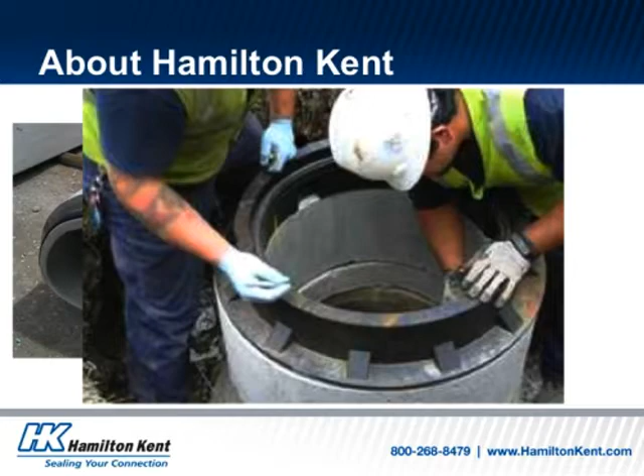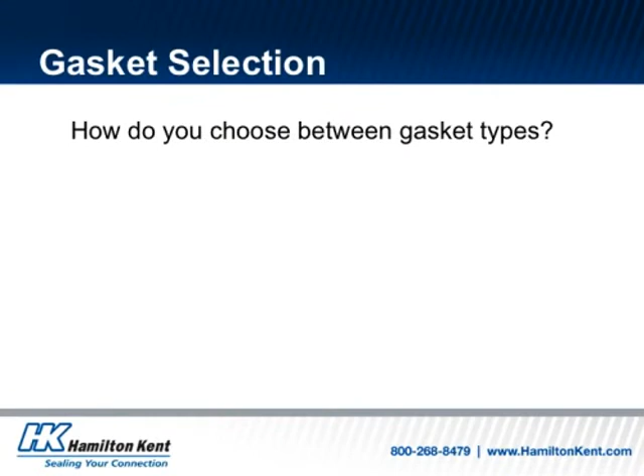In this webinar, we will outline the process of gasket selection and current pipe gasket standards. While gasket selection may seem straightforward, there are many aspects to ensure the right gasket is selected for the application. The first major factor a plant must consider when selecting gaskets is the type of tooling being utilized. This will narrow the selection of gaskets immediately.

Number two, if you are purchasing new tooling, you can formulate a plan for gaskets at the same time. You will have some control over how much you pay for gaskets based on the configuration of the joint. The tighter the joint, meaning the smaller the total annular space, the smaller the gaskets, and the lower the purchase price should be. But remember that the tighter the joint, the more exact you'll have to be during production.

Number three, what are the contractors in your market expecting? O-ring, profile, or pre-lube gaskets? Checking with your customers would be a good idea and could dictate to some extent what gaskets you end up using. Some plants decide what gasket they want and don't give customers an option. This depends on your relationships and your ability to train customers on the use of a new gasket type. It's likely some education will be needed to get them started.

The final consideration is what gasket characteristics are most important to you. If you say price first, that may limit your options. While price is always important, the overall value to you and to your customers is of greatest importance.

We had a customer tell us that they wanted to switch to a pre-lubed gasket because it was more contractor-proof. They figured that if the contractors were not going to equalize or lubricate the gasket anyway, the plant might as well send out a gasket that did not require these steps. They figured money would be saved by cutting down on the number of field service calls, even though the gaskets were more expensive.

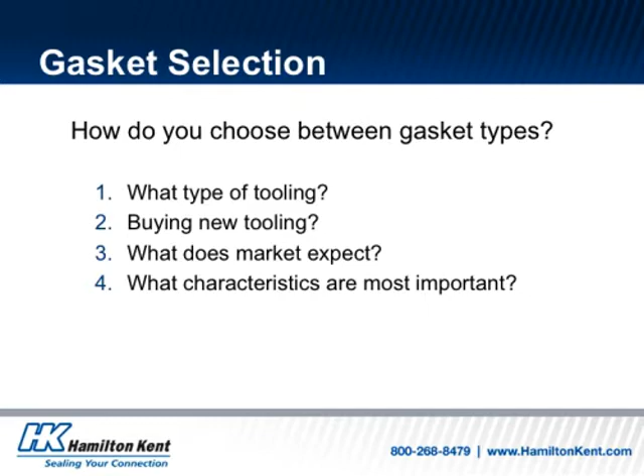The next step in the process is to have your gasket supplier outline your options via the following process. First, the gasket company's engineering department will review the project or plant requirements and your plant's drawings for the total annular space, the diameter of the spigot, and other relevant dimensions depending on the gasket type. The engineers will then determine which gasket or gaskets they have available that will meet the requirements found during the evaluation.

Finally, they will calculate the correct amount of stretch for the selected gaskets to determine the cut length of the gasket or gaskets. Obviously, they want to supply a gasket that will provide enough deformation and sealing force, but also ones that can be installed on the spigot with a reasonable amount of effort and will not be too loose and roll out of place when the joint is closed.

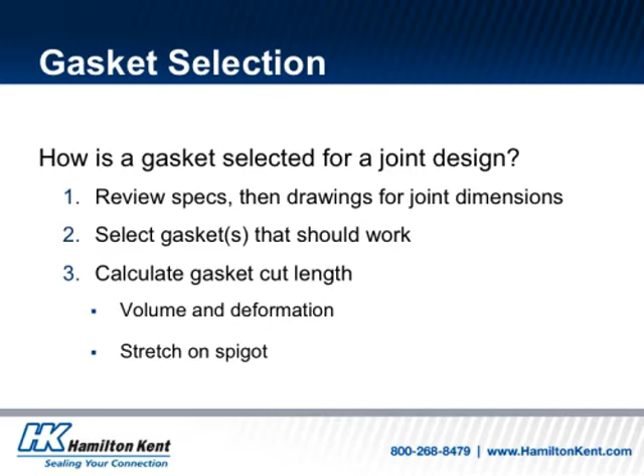Here's an example of a form containing gasket data you should expect to receive from your gasket supplier. The sheet should contain all of the critical measurements with regards to the selected gasket for each pipe size, including the part number, size, type, height, and more.

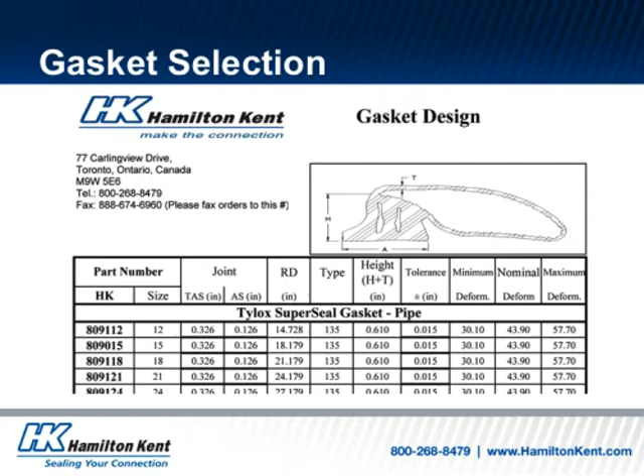This is all important information you should keep in your records, especially if you are responsible for a plant certified under the American Concrete Pipe Association's QCast program or the National Precast Concrete Association's Plant Certification Program, as inspectors may ask to see it during their inspections.

Now let's talk about material selection. We expect that in some cases, the gasket material your plant uses will be dictated by the specifications on a project. But in most cases, there is no material requirement, so you're getting the rubber material selected either by your plant or by your gasket supplier to meet everyday requirements. You may be required to utilize gaskets made of specialty rubber materials like polyisoprene for C1619 Class A or C361 projects.

EPDM rubber has excellent ozone and UV resistance, so gaskets made of this material are used for applications where the gaskets are expected to be exposed to these elements for an extended period of time. For instance, box culvert or pipe where the gasket must be glued onto the spigot in advance of shipment to the job site. Other rubber materials might deteriorate enough in these situations to jeopardize their performance on the job site. EPDM is also a great material for applications where the joint could be exposed to acidic or high alkali conditions.

Some projects require oil-resistant gaskets, which are usually made from neoprene or nitrile rubber. These types of projects include airports and parking structures or lots where there is potential for exposure to high levels of de-icing chemicals, oils, and fuels. In these cases, it is absolutely critical that your sales and estimation team pay close attention to the specs and even ask the project engineer to be certain. The price of these materials is significantly higher than typical rubber gaskets, and the delivery time will be substantially longer, so it will have a big impact on your bid price and on your schedule.

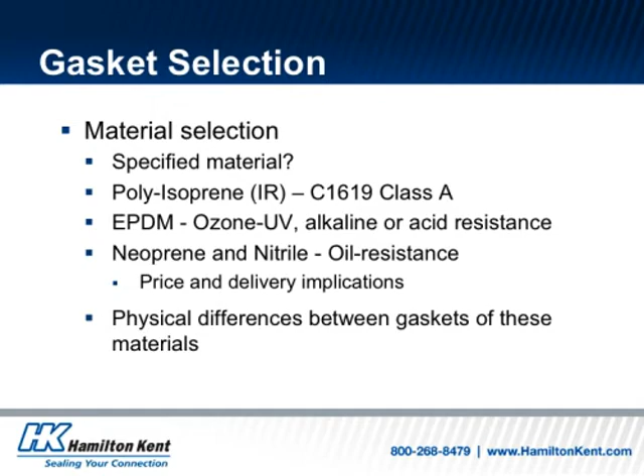One final note, there will be physical differences between gaskets made of different materials, especially neoprene and nitrile. Gaskets manufactured from these two materials will feel harder and more rigid and will be more challenging to install on the pipe. In this case, completely closing the joint will take more insertion force.

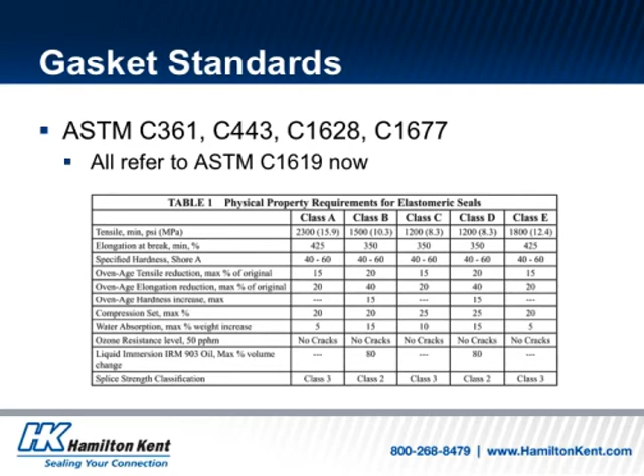Now let's take a moment to talk about ASTM requirements for gaskets. The industry requirements that were popular for so many years now refer to one specification for the physical properties of rubber gaskets, and that's ASTM C1619. So while you still see requirements for ASTM C361 and ASTM C443, your sales and engineering team will want to be familiar with the corresponding requirements in C1619. This is an outline of the different physical properties for each class, which I'll review on the next slide.

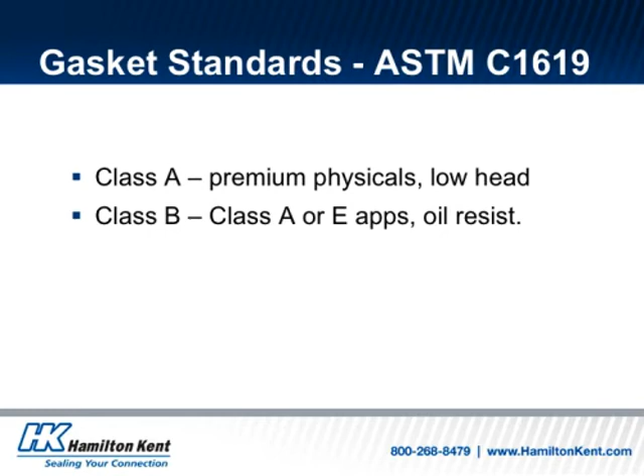Briefly, these are the descriptions for various classes of C1619 materials. Class A, this is your C361 gasket, which is used for low head pressure and will have premium physical properties, such as higher tensile strength. Class B, this requirement is for Class A or Class E applications, but with oil resistance. Class C, this is your everyday gasket for most common applications and corresponds with C443. Class D, these gaskets would be for Class C applications, but with oil resistance. And finally, Class E is for gravity flow sewers with 30 feet or less of hydrostatic head.

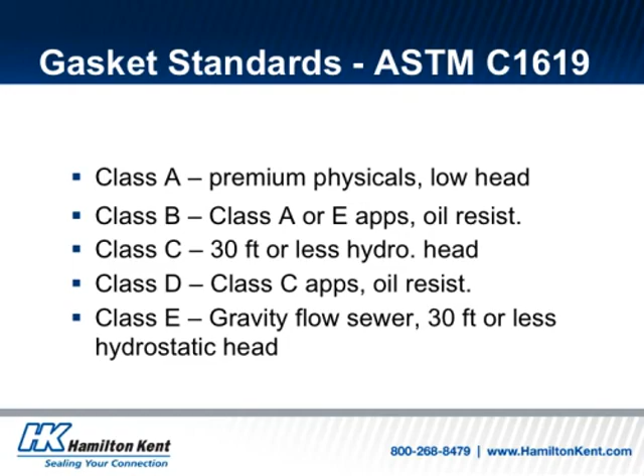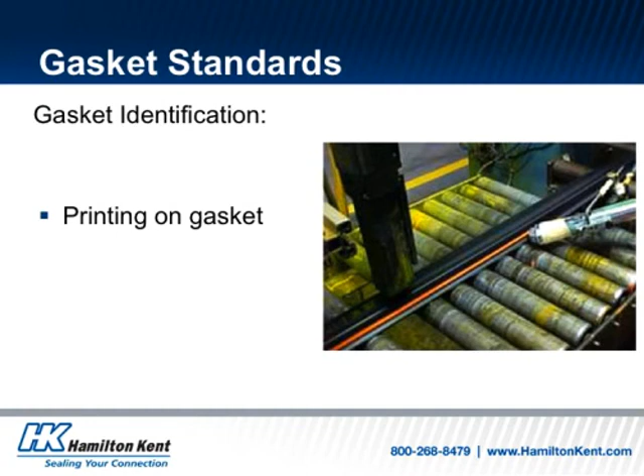Once you have specified your gasket, how do you know the gaskets you received in the field meet the project requirements? First, check to see that the gaskets are printed with the ASTM standards that they meet. Second, check to see if there is a colored stripe printed on the gasket. This is a common feature on specialty rubber materials to make them easily identifiable in the plant and in the field. In this photo, you can see the printing process with spec and product info printed in yellow on the top and the material identifying stripe printed on the front.

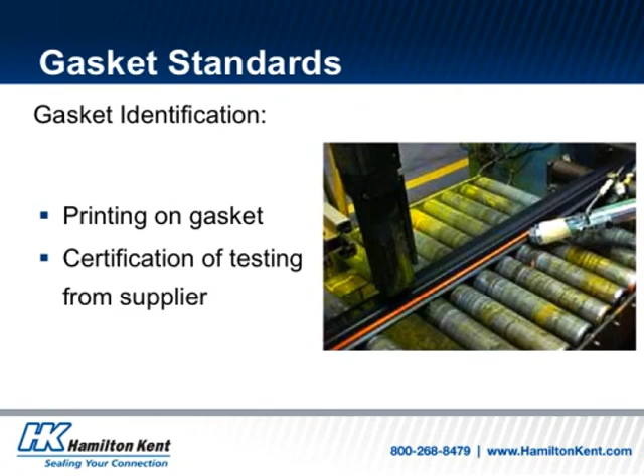If you are supplied by Hamilton Kent, we also provide customers with the results of physical tests performed in our QA lab as compared to ASTM physical requirements. All this can be supplied to the project engineers if required.